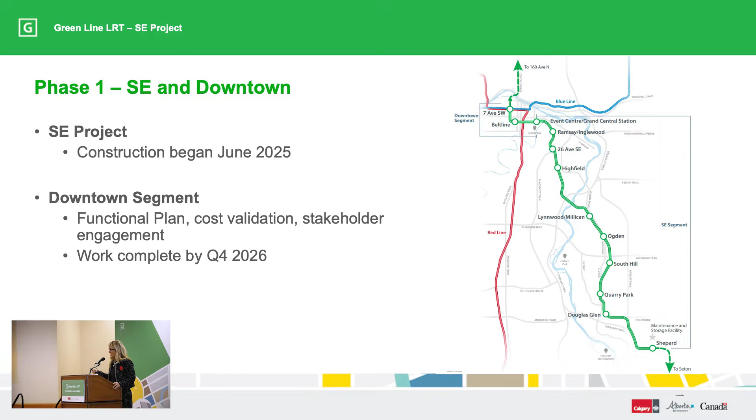As the video clearly outlined, there's 16 kilometers of track, 10 stations, we cross the river twice, 3 park and rides, 1 new beautiful maintenance and storage facility at Shepard, and a fleet of new low-floor vehicles which are currently under production.

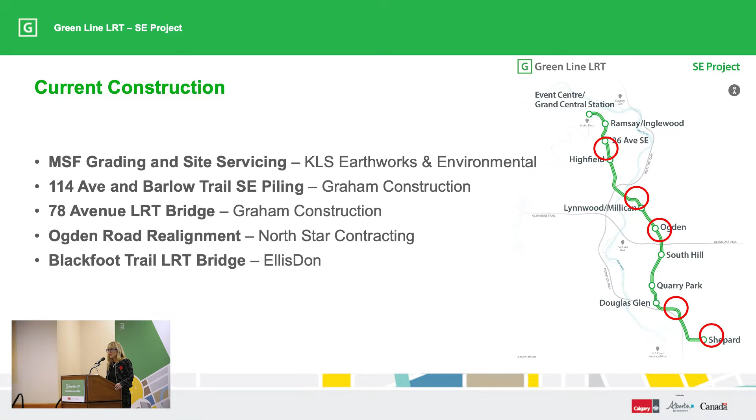So current construction - as I said, we broke ground at the end of June of this year following a very shiny shovel event with all orders of government to prove that this project was really funded and moving forward. Big thanks to those of you in the room who have jumped in and undertaken this work, but what you can really see is that there is work underway across the alignment, making sure we're doing as much work as possible to be ready for the big contracts next year.

So the big contracts next year - we have about $1.5 billion in civil contracts that will be the bulk of the work, the civil work, through to 2031 when we're ready to start running the trains.

You've seen our shortlisted teams who went through the RFPQ process. Thank you all for being with us today, but thrilled to have Aecon, EllisDon, Flatiron Dragados, Graham, and PCL shortlisted on each of the 5 packages in various combinations, which we'll speak to in a bit. One of the things I love as a Calgarian is that these teams are local, and it really sets the stage for this being a project for Calgarians that will be built by Calgarians. This is long-term work where teams can go home and have dinner with their families and see the potential of being part of this project and the pride in building Calgary's future.

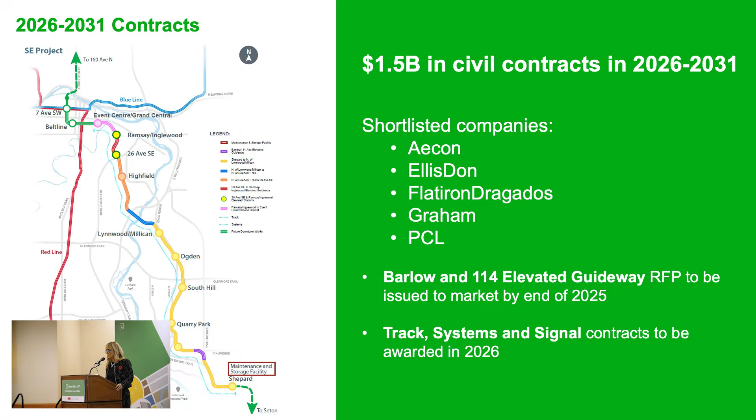So though the RFPs for those packages will go out beginning in the new year in Q1 and be staggered throughout the year, within the next month we will be putting out straight to RFP an additional package for the elevated guideway at Barlow and 114th. That initial work has been underway by Graham, but that will go out to RFP. And then the track systems and signal contracts will be awarded in 2026 as well.

So let's chat about the packages. Shepard to Bow - this is almost 8 kilometers of track. Very happy to share that Aecon, EllisDon, and Graham will be bidding on this scope of work: 6 at-grade stations, 7 utility buildings, at-grade crossings, the bus depots, park and ride sites, and all the good things that come along with it.

For clarity, as we look at the packages and the timing of what will be coming out too - as I shared with some of you in the room over coffee this morning - as I mentioned, the new fleet of vehicles is under production.

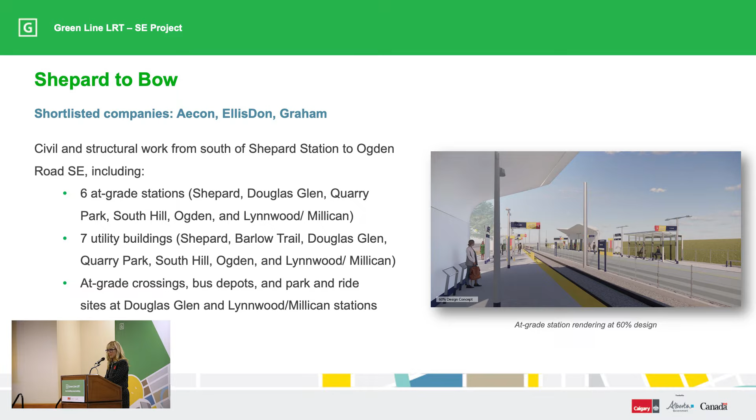Once they arrive, each vehicle will need 1,000 kilometers of testing before it is ready for revenue service and approved by Calgary Transit. So we need to make sure we have enough track ready to go to start putting those trains on when they arrive. So there will be a bit of a focus from building south to north, as well as managing the fish and when they like to swim in our river and when you are all allowed to construct around them.

Which has the aforementioned fish, the Bow River package. So Aecon, Flatiron Dragados, and PCL are the shortlisted teams on this work. This is really the civil and structural work going from the Lynnwood/Millican Station right to 46th Avenue, including the 2 crossings and the big guideway.

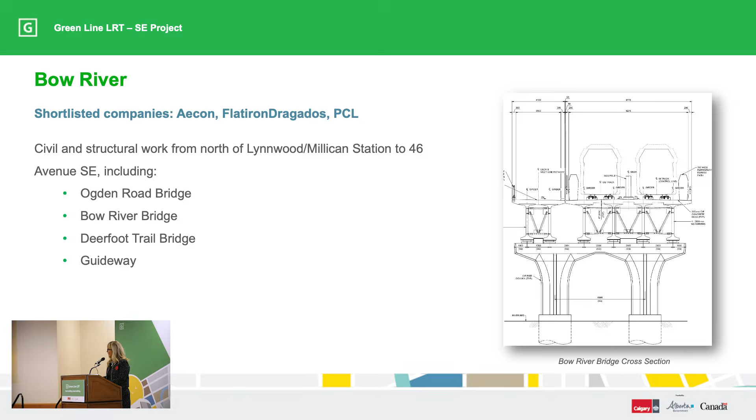Highfield Station. This package has 4 shortlisted teams due to, truthfully, just where the scoring all ended up. So EllisDon, Flatiron Dragados, Graham, and PCL will be one of them, will be our partner on this project. This is civil and structural work right to the south limit of the Blackfoot Trail Bridge, which EllisDon is constructing for us. It includes the 1 at-grade station, the 2 utility buildings, fitting out the CN Highfield Tunnel which was previously completed, as well as the guideway and at-grade crossings.

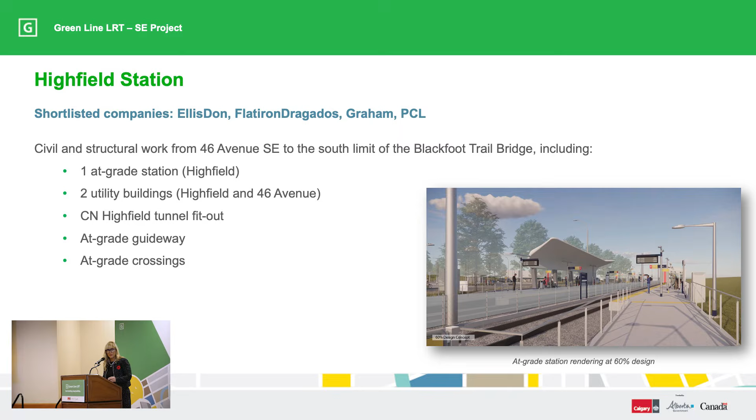The 4th package are the 2 elevated stations, at 26th Avenue, which is adjacent to the Crossroads Market, and then at the Ramsay/Inglewood Station. I'm very pleased that EllisDon, Graham, and PCL were shortlisted for this scope of work. You can see the renderings as I've been flipping through them, but just to give you a little bit of an idea as to what that station area will start to look like.

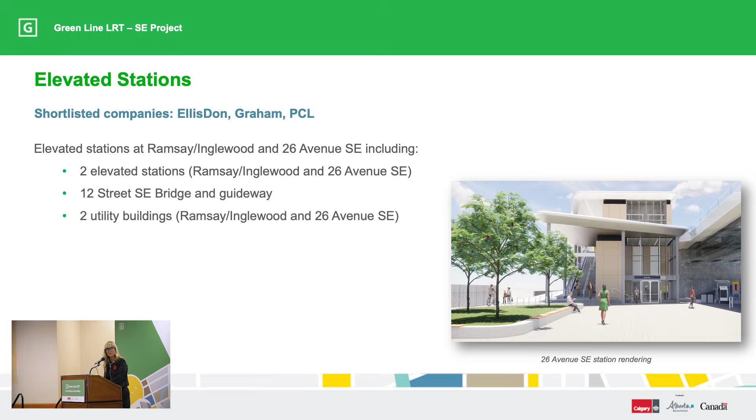And then to connect the 2 elevated stations, well, we need the Ramsay Elevated Guideway. So this is the 5th package that will be coming out next year. All of this information is also on our website as well, so it's a great reference afterwards. This will be the connection between the 2 stations in that area.

Now, you may be wondering, well, Wendy, you said that we're building through to the Event Center, and these packages stop at the Ramsay/Inglewood Station. As I mentioned, there's still work underway on the downtown segment and how that is all going to come together. We do need to have revenue service into that Event Center Grand Central Station by 2031, but we've just staged the work. So there will be one more remaining package to go from Ramsay/Inglewood to the Event Centre, but we are relying on additional information on the vertical alignment of the downtown segment, as well as some work from the province on the provincial rail master plan and how that's all going to work. So that piece of work will still be coming.

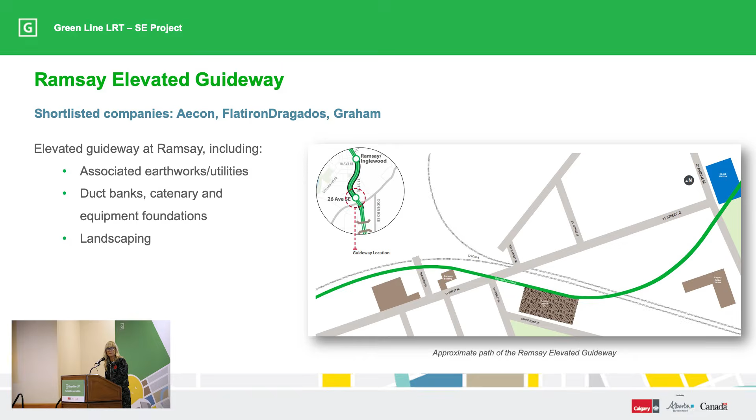So I want to chat a little bit about our Community Employment Benefits Initiative. At peak construction, we are going to need about 1,000 workers per day on this project. And with 21% of the workforce expected to retire by 2034, this is something that collectively as an industry we need to be aligned on and working towards.

There's a bunch of information in the booklets on your tables about this, but we're really looking at ways that we can help support and be that connection into bringing forward a career in the trades, and also really looking at a number of different strategies to connect the opportunities with those who may be typically underrepresented on some of these projects. Which is why we've invited, and hopefully you've had an opportunity to meet some of these folks already this morning, but 7 great groups who are really at their core supporting this work. I'd encourage you all to take the time this morning to meet them, to make those connections. Thank you all very much for being here.

Careers, Office to Advance Women Apprentices, Trade Winds to Success, the Educational Foundation, Women Building Futures, YOIC Trades Training, and our partners with the City of Calgary Employment. This is how we can grow that capacity and make sure that people really see the opportunities available, not only on Green Line, as Michael spoke about the extensive capital plan that the City of Calgary has underway, as well as the myriad of other projects in our very growing city. This will be a priority for us, and I encourage you to take one of those booklets with you and make sure that you're up to speed on where our heads are at on this key scope of work.

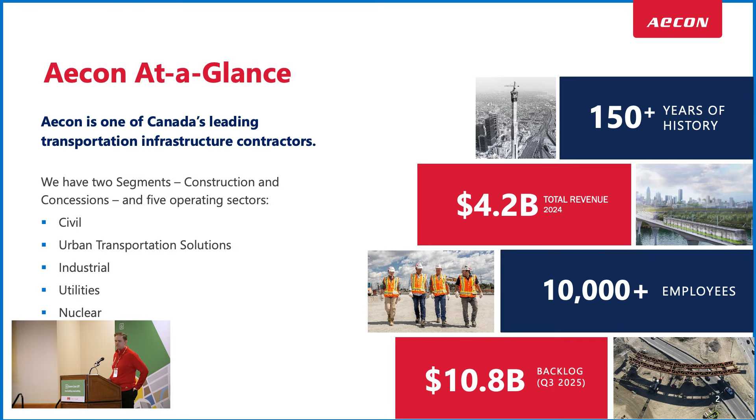We have construction and concession segments. We also do civil works, urban transportation, which is rail projects, industrial, utilities, and nuclear projects right across Canada and in the US. Some of our civil capabilities and a lot of our experience is in Calgary, working for the city and working with people. We are Calgarians at heart, and that's the people we have working here.

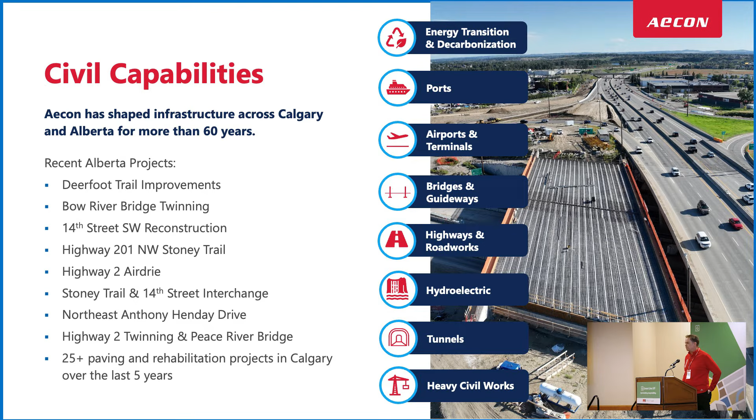Right now we're doing the Deerfoot Trail Improvements Project here for Alberta Transportation. Bow River Bridge we completed a couple of years ago, as well as 14th Street, Highway 2 Airdrie, Stoney Trail, Highway 2, and we do multiple projects for the City of Calgary around the area every year. So you've probably seen lots of our signs out there on the roads and projects.

As well as LRT capabilities, we have Scarborough Subway, GO Expansion, Surrey SkyTrain stations in Vancouver, the REM job in Montreal, Eglinton Crosstown LRT, Finch West, Waterloo - an extensive repertoire of LRT projects right across Canada. We're delivering these projects as an experienced contractor, and bringing that to this project for the city and for Calgary.

Some of the opportunities that Wendy spoke about earlier, Aecon is shortlisted on 3 of the projects. These are the 3 we're shortlisted on: the Ramsay Elevated Guideway, Bow River, and Shepard to Bow. This is not an exhaustive list of some of the packages that are in there. There's also going to be a supply chain in there, depending on how the breakdown comes out.

We have the yellow line on the bottom, the Shepard to Bow, we have Bow in the middle, the blue, and we have the red on the top, the Ramsay Elevated Guideway. Some of the packages you're going to see here, from hydrovac, hauling, fencing, guardrails, pavement, signage, precast girders, vehicle barriers, reinforcing, concrete. There'll be earthworks, dewatering contracts in there, noise walls, temporary engineering, concrete ready mix. On some of the Ramsay and Bow River projects it's similar in that regard.

It's a lot of structure-heavy work. Piling works would also be part of that. The Shepard to Bow is more of an at-grade type running, not as structure heavy, but it has all the station stops, bus loop, and transit centres within that. So in those we'll have architectural packages from Division 4 through 14, mechanical, electrical, asphalt, drainage, utilities, earthworks and grading. As these packages come out, we'll be advertising them through Building Connected, reaching out to supply and subtrade.

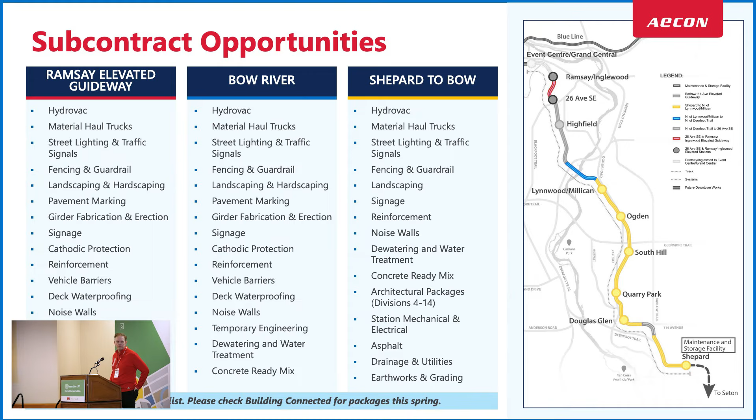Aecon is a safety first and safety always culture, so we look for any of our subtrades and suppliers to be ISN Network certified. That will all be in the packages when we start to issue those out as they come to market. So yeah, we look forward to looking at some of them.

Also in the community employment benefits, we are working in the local community. We are reaching out to different community groups, and we have a long history of doing that right across Canada and right across Calgary as well. $1 million invested in charities and non-profit organizations, over $1 billion procurement through Indigenous economy over the last 5 years alone. That's all right across Canada, and 40 million plus in community employment benefits in different areas.

Again, we work in the areas, we're here to make a long-lasting impression. We're here for 1, 2, 3, 4, 5 years, depending on the project, and we want to leave a lasting impression for those that come after us.

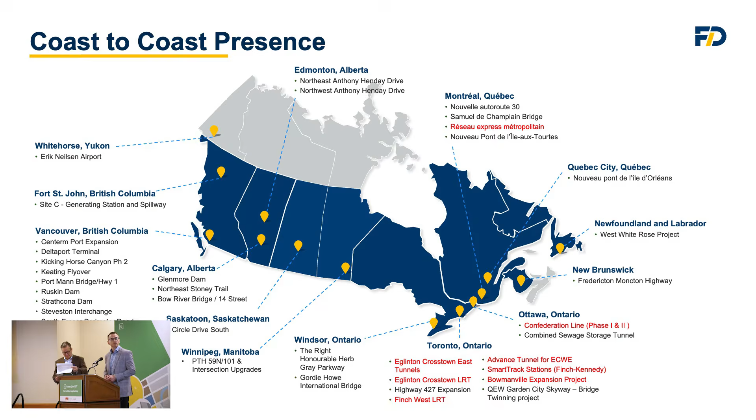So what are our values? We value the following: safety, excellence, integrity, accountability, and teamwork. If that generally lines up with you, then you line up with us, and we'd like you to help us deliver our projects.

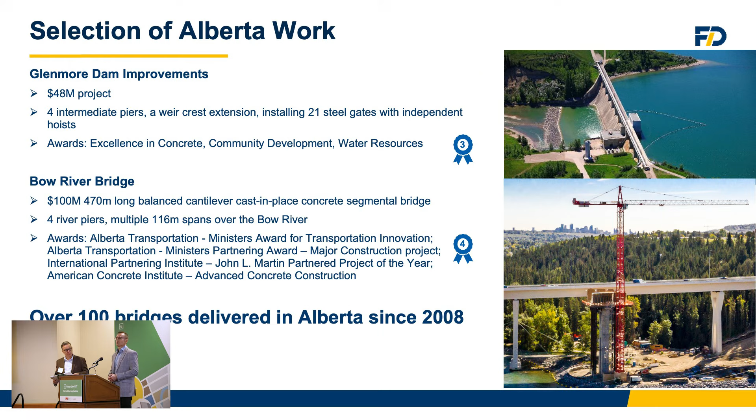Some of the work you've seen locally, just in Alberta: we've got the Henday's Northwest and Northeast in Edmonton, here in Calgary, Northeast Stoney Trail, which started in 2008. Lots of awards for all of those, project teams are all very proud of the work they've done here. More recently, Glenmore Dam improvements for the City of Calgary, and also Bow River Bridge, where we were co-lead with our colleagues at Aecon in delivering a very complex segmental job. Since 2008, Flatiron Dragados has delivered over 100 bridges just in Alberta, a very significant portfolio of work, more than 200 retaining walls. So we'd like to bring that expertise to bear with you.

So what have we pre-qualified for? We have pre-qualified for Highfield, Ramsay Elevated, and Bow River. So if your scope of work or specialties lines up with that, please get in touch.

What are we looking for? Really, we're looking for similar shared values from our suppliers and subcontractors, what we described on the previous slide. We'd like to see a demonstrated track record of safety and a commitment to safety, a demonstrated record of quality of work and pride in that work, which I'm sure you've all got, and also expertise with the City of Calgary specifications.

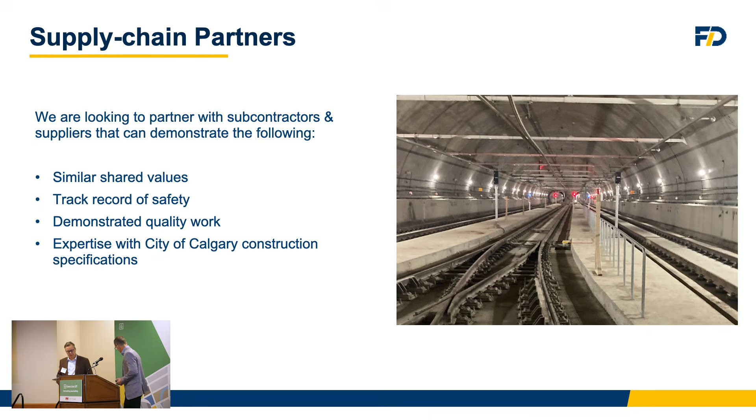So, Neil pretty much said it all. It's nice to meet you all. Some familiar faces here. It's nice to reconnect with the family. But Neil kind of said it.

If you feel you guys have alignment with our values and what we're looking for going forward with this project, hopefully successfully, we're over at the booth at the back here. My name's Joe Gallagher, I'm the procurement lead for the whole of Canada for Flatiron Dragados. So please come and make a connection, and we'll move from there. Thank you very much.

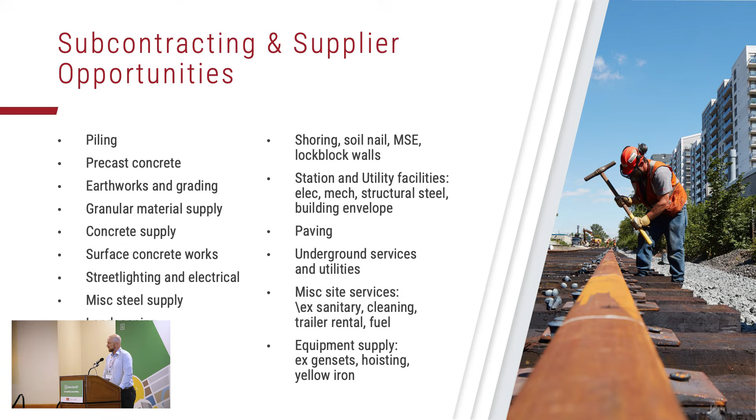Similar to the other folks, we have tons of subcontract and supply opportunities, and this isn't an exhaustive list, but please come around to our booth. We have a QR code for folks to fill out and put their contact information in, so we can get a database together.

I'd like to just really quickly touch on our process. Similar to EllisDon, we have a pre-qualification process, which includes a financial review. It also includes a safety and quality review. The process we're going to go through is we'll get the RFP, we'll put together some packages, it will take a bit of time, we'll send them out to the market. We'll request responses back, give ourselves a little bit of time to go back and forth with any clarifications, and then we'll submit our pricing into the city for each of the projects.

I'd like to touch a little bit on the Community Employment Benefits Plan. It's awesome to see that the trade partners are here, and we've actually collaborated and worked with a few of them, so that's wonderful to see. There are going to be targets set for specific underrepresented groups. We have quite a bit of experience working with local organizations and these groups, and we're committed to not only help our subcontractors navigate what this means for their works and how it's going to happen, but for our works as well to meet the requirements.